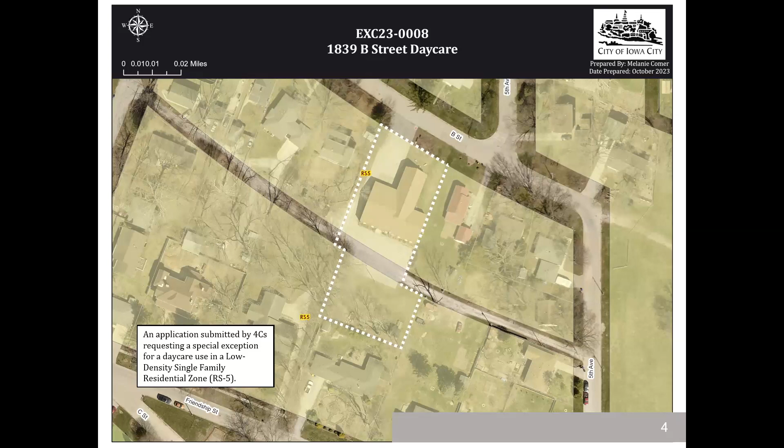It's also a bit unusual in that there's an alley to the south that exits onto Fifth Avenue and Garden Street, but it does bisect this property. So there's a portion of the lot that's north of the alley, and a portion that's south of the alley. The property is in a lower density single-family neighborhood, which is reflected by its RS5 zoning, or low density single-family residential zoning.

So in terms of what's being proposed, 4Cs has an offer to purchase the subject property at 1839 B Street to use as a childcare. They've indicated an interest in using it for up to 120 children.

The property is an older property. It was built around 1960 as a church, but it's been used as a fraternal lodge by the Independent Order of Oddfellows since around 1974. It was built prior to its current zoning, so there are several legal nonconformities that are allowed to continue as long as the building isn't expanded or structurally altered.

And the applicant is proposing several sets of site improvements as well. So I just want to bring up the site plan to talk through these.

For the most part, vehicular access will be the same on that north portion. One of the big changes is that the drives to the west of the building would become one directional, so you would enter from B Street and go south down to the alley.

Another change is that there would be a pedestrian connection added through the site, all the way from the right-of-way to the portion of the property south of the alley. There would also be a demarcated crossing over the alley.

In addition, that south portion would have a new parking area added, as well as a play area, both with access from that pedestrian site. It's hard to see here, but the alley is proposing landscaping screening which complies with our current standards. The applicant is also showing alley improvements from the property line east over to Fifth Avenue.

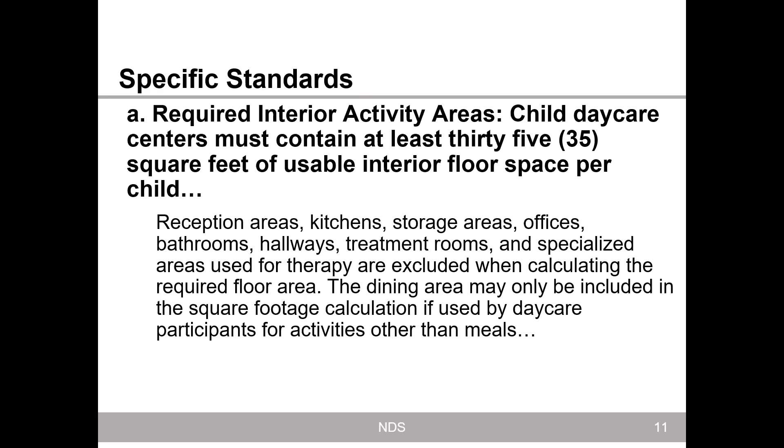There are several standards. The first is that required interior activity areas must contain at least 35 square feet of usable interior floor space per child. There are certain excluded areas, mostly bathrooms, offices, and hallways. This subject property is pretty large, with nearly 7,800 square feet of usable interior floor space. Theoretically, that could accommodate up to 222 children.

It is more restricted based on the parking and some other site elements than its floor area. The applicant proposes using it for a child daycare use with up to 120 children, so it's well below the maximum that would be allowed.

Next is required outdoor areas: the child care use must provide a fenced outdoor play area of not less than 100 square feet per child, based on the maximum at any given time. There are setbacks for playground equipment, which is not permitted within side setbacks or the front setback, and these areas must be well drained, free from hazards, and readily accessible to the daycare center. It must also have a fence enclosing the outdoor play area that's at least 4 feet in height. Since the property is zoned residential, that 4-foot standard applies.

All playground equipment shown on the site plan is located outside of those restricted areas. The site plan includes an outdoor play area of approximately 2,156 square feet, which could accommodate up to 21 children at a time. It's surrounded by a 4-foot fence, as indicated on the site plan, and is also accessible by a pedestrian path with the demarcated crossing in the alley.

I also wanted to note that in terms of outdoor play areas, it's within easy walking distance of Chadek Green Park as well. Based on this, staff does believe that this standard is met. There is a possibility that the play area could be expanded in the future, which would allow more kids outside as well.

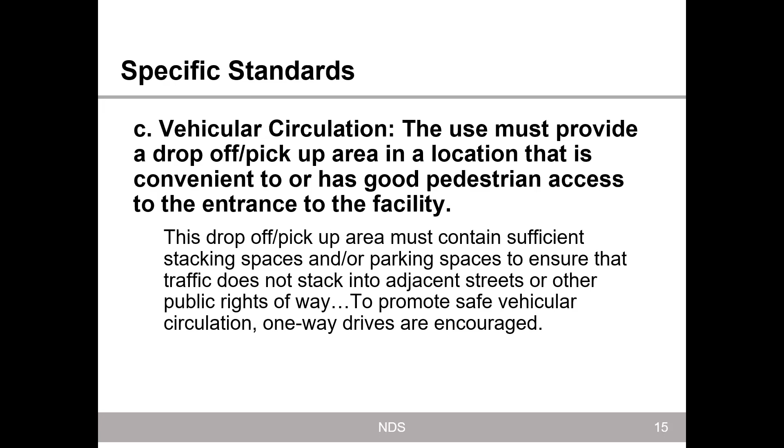In terms of the way that's structured, I already discussed it. It's expected to flow in one direction from B Street to the north, down to the alley, and exit east onto Fifth Avenue. The alley is currently unimproved, so the site plan showing an improved alley, staff does recommend that be a condition of approval of tonight's special exception. In terms of ongoing maintenance, that's handled by adjacent property owners, mostly putting that as a heads up for folks.

The subject property has 29 parking spaces on it. 15 of those are in the new spaces south of the alley, and there are 14 existing non-conforming spaces north of the alley, some of which are in front of the building. The site also has 7 stacking spaces west of the building on a 9-foot wide one-direction drive, and all parking and stacking spaces are connected to the building with pedestrian routes, so staff believes this criterion is met.

Continuing with this criteria, the minimum parking requirement is 1 space per employee based on the max employees on site at any one time, 1 space for each 10 kids served by the max number of children on site at any one time, and 1 stacking space for each 20 children served by the max number of children on site at one time. Those 20 children per stacking space can also be switched out for parking. But as noted earlier, parking is the primary limiting factor in this building.

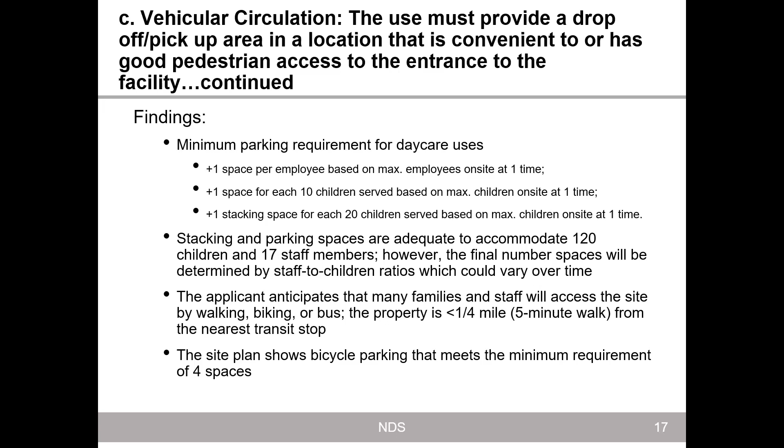Next is tied to pedestrian circulation, which requires that a sidewalk be constructed connecting the main entrance of the center to the adjacent public right-of-way. It must be clearly separated from vehicular circulation to minimize conflicts between vehicular and pedestrian users.

There is a sidewalk that already exists from the main entrance to the public right-of-way. There is no sidewalk along the B Street right-of-way, so it leads to the street, not to a sidewalk, but it is there. The site plan also proposes new sidewalks with raised curbs through the property along the west and south sides of the building, which helps minimize the extent to which users must walk across drives or aisles.

Staff also recommends a condition that any new pedestrian routes through the site have a raised curb to help ensure pedestrian safety. This criteria doesn't specify that it has to be a raised curb, but staff would recommend that be a condition of approval.

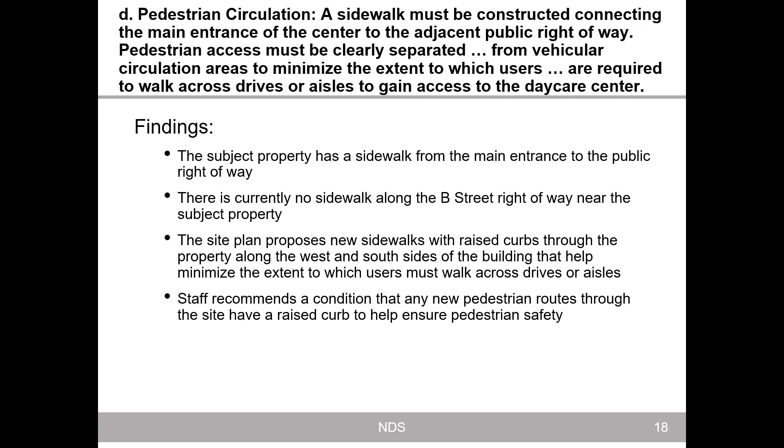Next is related to site development standards. If it's located in a residential zone or the central planning district, it must comply with the multifamily site development standards in this title. In this case, the proposed use is in both the residential zone and the central planning district, so it has to comply. The building and site do meet some multifamily site development standards, but not standards related to the location and design of surface parking, mechanical equipment, and additional standards in the central planning district.

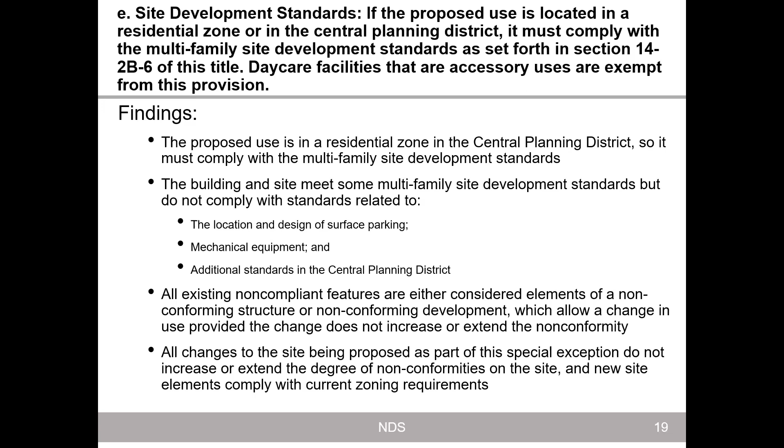That being said, all of the existing non-compliant features are considered elements of a non-conforming structure or non-conforming development. That means a change in use can occur provided it does not increase or extend the non-conformity. In this case, it does not. All changes to the site being proposed, specifically the new site elements being added, do comply with current zoning standards. So staff believes this criteria is met.

Which brings us to the general standards that apply to all special exceptions, found at 14-4B-3. There are 7 of these. The first is that it can't be detrimental to or endanger public health, safety, comfort, or welfare. It is an existing building that's been around for a long time.

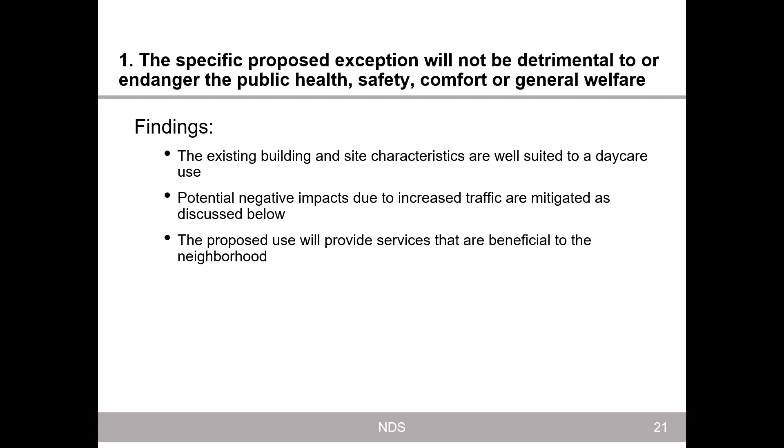The building and site characteristics are well suited to a daycare use. With the conditions discussed through this presentation, we believe that helps mitigate any potential impacts due to increased traffic, and we believe the proposed use will provide services beneficial to the neighborhood and community. So with that, staff believes this criterion is met.

The next standard relates to whether it will be injurious to the use and enjoyment of other property in the immediate vicinity or substantially diminish or impair property values. It is located in an existing building, and there are no changes being proposed to that building. Outdoor play areas are relatively small, set back, and screened from adjacent properties, which staff believes will help mitigate noise impacts. Additional traffic will be generated by the use, but it'll be during business hours, and the proposed traffic flow and site layout, with recommended conditions, will help mitigate these potential negative impacts. In addition, the new parking areas south of the alley are adequately set back and screened from abutting uses according to our standards. Staff does recommend that the S2 screening shown on the site plan be a condition of approval, since that element is being brought into conformance with our zoning code and would not otherwise be required as a non-conforming development.

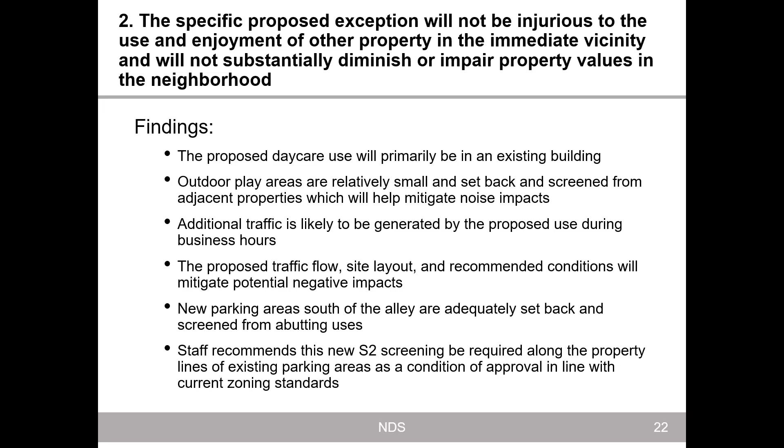Next is that it won't affect surrounding development, the orderly development and improvement of surrounding properties. It is an area fully developed as a residential neighborhood, occupying an existing structure that's been around since 1960. It will provide beneficial services that staff doesn't believe will substantially impact the development or improvement of surrounding properties, and we believe the conditions will help mitigate any potential negative impacts for those surrounding properties. So with that, staff believes this criterion is met.

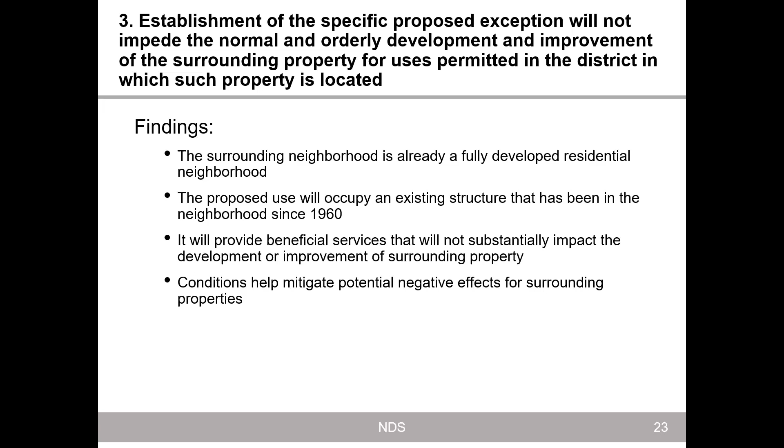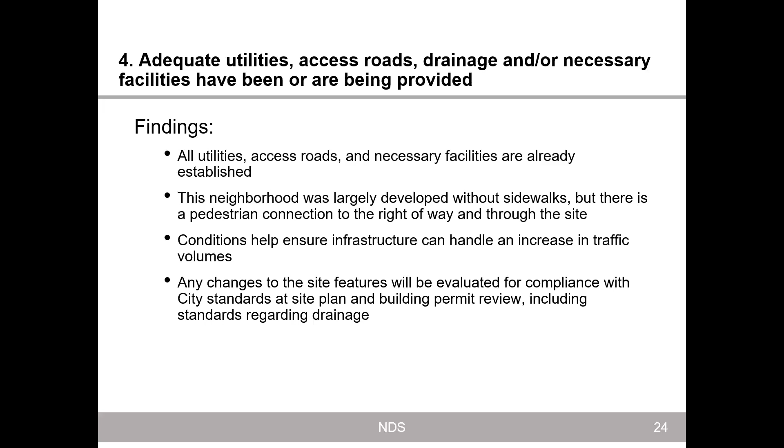Next is that it has adequate facilities. It is an existing area, so it has utilities, access roads, and other facilities already provided and established, and it was largely developed without sidewalks, but there is a pedestrian connection to the right-of-way and through the site. We believe conditions help ensure the infrastructure can handle increased traffic volumes, specifically along that alley, and any changes to site features will be evaluated for compliance with city standards at site plan and building permit review, including those related to drainage. Staff did consider requiring a sidewalk in front of the building, since that's not something provided in this area, but because it's a condition where the broader neighborhood doesn't have sidewalks, adding a sidewalk specifically in front of this one building isn't necessary to improve the safety of the area. I just wanted to note that verbally; it was not included in the staff report.

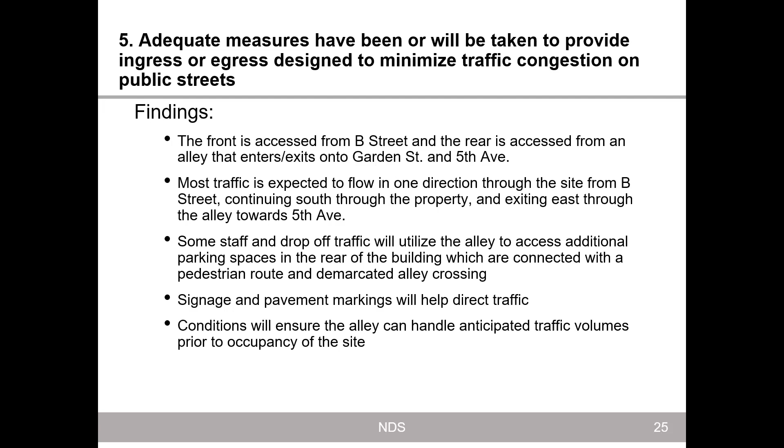The next standard relates to ingress and egress design to minimize traffic congestion on public streets. As noted, the front is accessed from B Street with the rear accessed from the alley. Most traffic is expected to flow one directional through the site, exiting east towards Fifth Avenue on that alley. For staff and drop-off traffic, that'll utilize the stacking spaces as well as some of the alley where there are additional parking spaces in the rear of the building. Those are connected to the rest of the building by a pedestrian route and a demarcated alley crossing. There is also signage and pavement markings shown to help direct traffic through the site, which will help minimize that congestion. In addition, the conditions will ensure the alley can handle anticipated traffic volumes prior to occupancy of the site based on how we are recommending the condition.

In terms of other changes to the site, there are no other changes proposed to the existing street or drive on the portion of the property north of the alley, and the new parking on the portion south of the alley complies with all current standards. In addition, the applicant anticipates many family and staff accessing it from other modes of transportation, and it is near an existing transit stop. With these factors under consideration, staff believes this criterion is met.

Next is that it complies with all other standards in the zoning code. As noted earlier, it does meet most standards of the RS5 zone, but it was built prior to the current zoning designation that it has, so there are elements that don't meet current standards.

Those are things like the way that parking backs into the alley wouldn't typically be allowed, the width of the aisle in front of the building does encroach into the side setback, and the need to provide parking lot trees. Those are things that are currently non-conforming that would be allowed to continue as non-conforming, in addition to those site elements I discussed that are part of the multifamily site development standards.

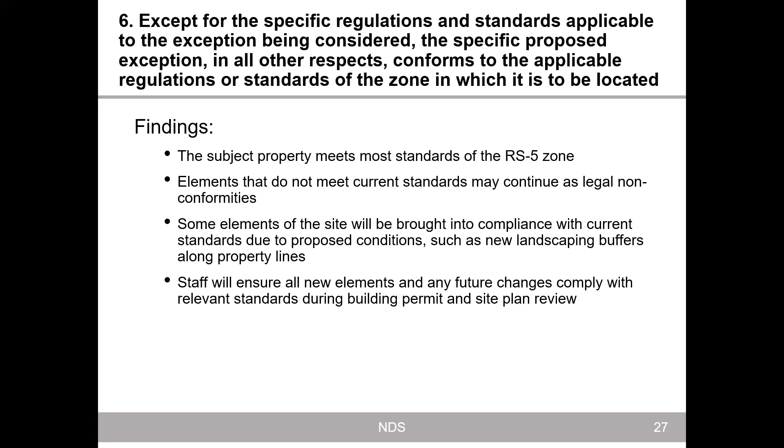However, this does bring several elements of the site into compliance with current standards, especially with proposed conditions related to, for example, the new landscaping buffers. And as things change in the future, staff will ensure that any new changes comply with relevant standards during building permit and/or site plan review, which is our regular process to check those things. But with those, staff does believe that this is met.

And then finally, that it's consistent with the comprehensive plan of the city as amended. As far as the future land use map designation for this area, the comprehensive plan shows it as residential, but the central district plan, which provides more specific guidance, shows it as private institutional. The comprehensive plan also generally supports providing goods and services within convenient walking distance for residents in the immediate area. And the proposed exception would convert what is an existing private institutional use to another private institutional use. So with that being the case, this is consistent with the comprehensive plan and the district plan as well.

So based on these findings, staff does recommend approval of EXC 23-0008 to allow daycare use in an RS5 zone for 1839 B Street, subject to 3 conditions that I've mentioned throughout the report. Those are: 1, design improvements to the alley from the area abutting the subject property to Fifth Avenue to the east, in addition to any pedestrian crossings, be designed to the satisfaction of the city engineer prior to site plan approval, and they must be accepted by the city engineer prior to issuance of a certificate of occupancy.

2, that screening to the S2 standard be provided between parking areas and adjacent properties along the east and west property lines as shown on the site plan that was submitted as part of this application. And then 3, that any new pedestrian routes through the site that directly abut parking areas be separated by a raised curb or barrier that is a minimum of 5 inches in height.

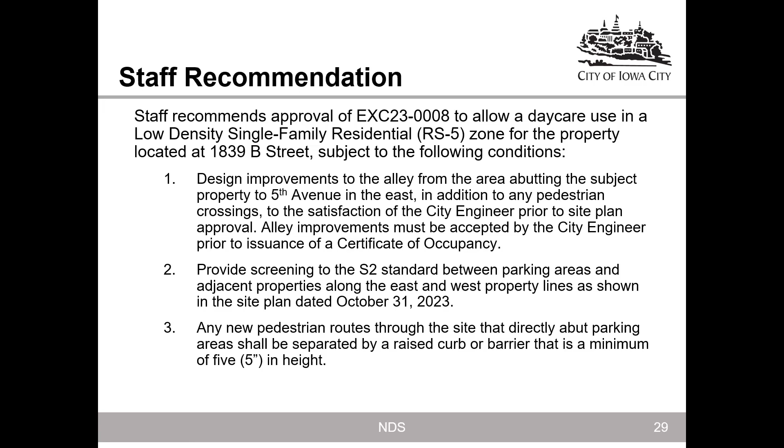Any questions for staff? Let's see if Bryce had anything. Bryce, do you have any questions? Do you have a map? Can you show me the raised curb? Do I have to say that to him?

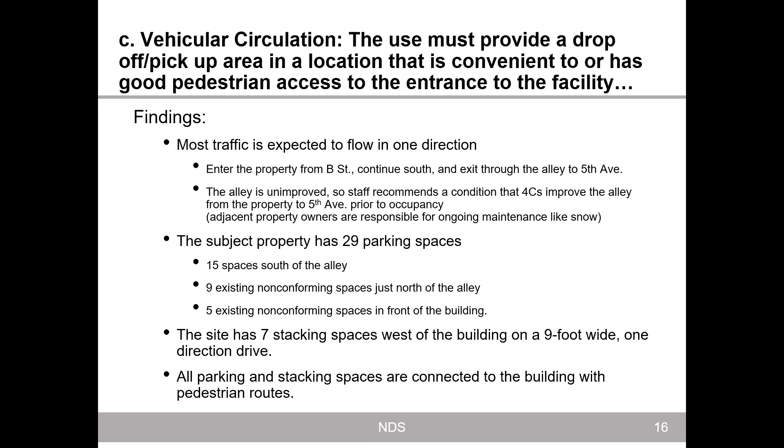Yeah, so the raised curb, let's go back to the site plan. So the new raised curb is where you have it, where that cutoff line is here, to the kind of northwest portion of the building. So there is an existing pavement that goes from the site to the main entrance. This would basically carry it around the house or around the property, have it be on the south side of the building, and then run it along kind of the east property line there.

So that's where we're proposing it would be a raised curb. In addition, it would need to be separated from the parking area by a raised curb as well. But typically with parking areas like that are new, you would have a curb regardless.

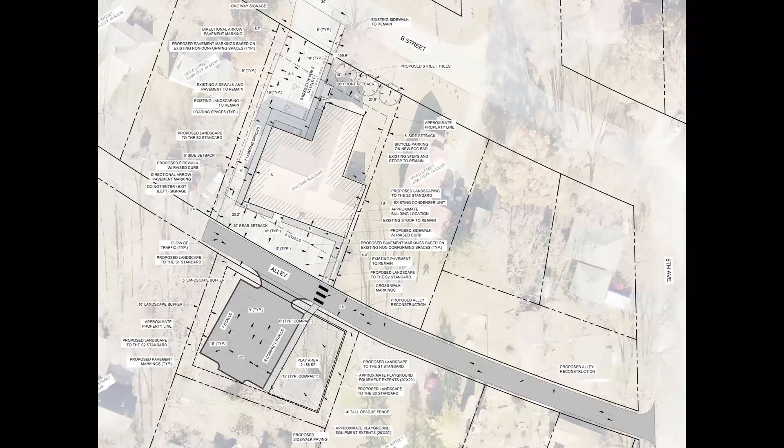It seemed to light up the area fairly well. I just didn't know if you were aware of additional lighting for that parking lot area. I am not—it was not shown in the site plan submitted. Okay, all right, those were my questions. Anybody else have any more questions for staff at this time? No. Okay.

All right, would the applicant like to speak, come to the podium, sign in, and present any information to the board?

Hi, I'm Missy Forbes, Executive Director at 4Cs. I'd be happy to answer any questions, or I can give you a brief overview of the intention of the project.

Part of our mission is to look at barriers to children accessing quality early childhood educational experiences, which we know leads them to be better citizens and students. One thing we've intentionally done is look within our community to see where there are deserts or pockets where child care isn't as accessible as it could be.

We identified this particular area of Iowa City as not having any child development home or childcare center within about a mile radius. We also identified that it's pretty close to a bus line, and there's a building that was for sale. So all of that pointed to doing a deeper dive into the property and what we could potentially do to put a childcare center in that part of town.